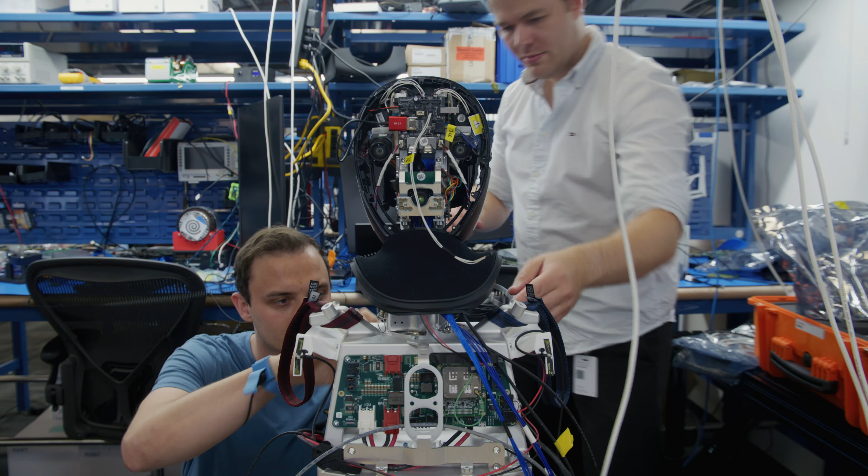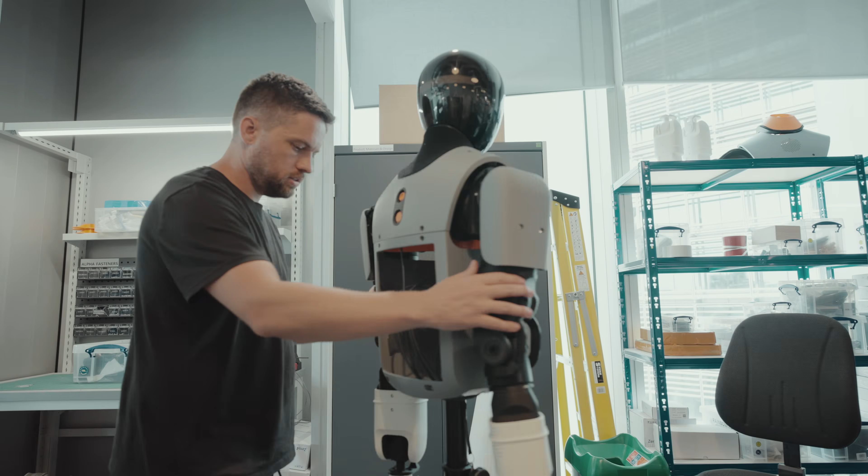We have this great vision to become the leading company in humanoid robotics all over the world. I think I've put 17 robots into the market now. I have never seen a first integration go smoothly. So yeah, realistically, something is going to go wrong. Something always goes wrong. All kinds of funny little problems are definitely going to happen.

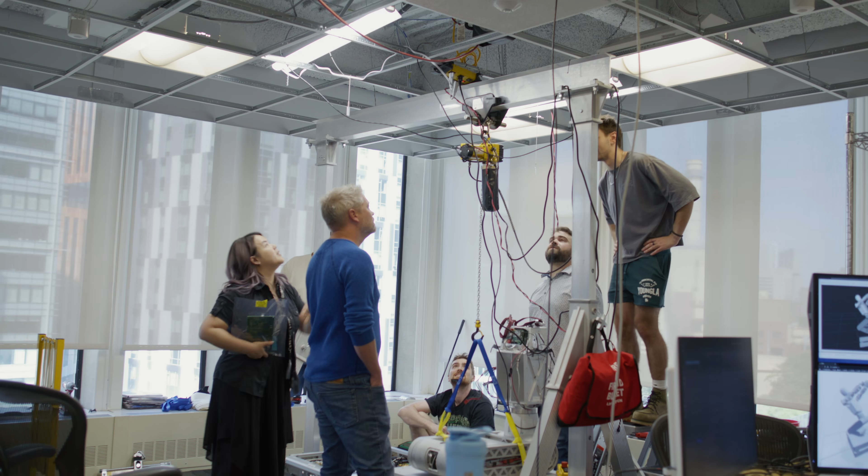Well, the arms are late again, so that's a problem. So that is making me nervous. I lost the power, the computer died. This entire thing is dead. See the number of cables hanging from this office building that we've turned into a robotics lab. We knew we were going to pop a circuit breaker.

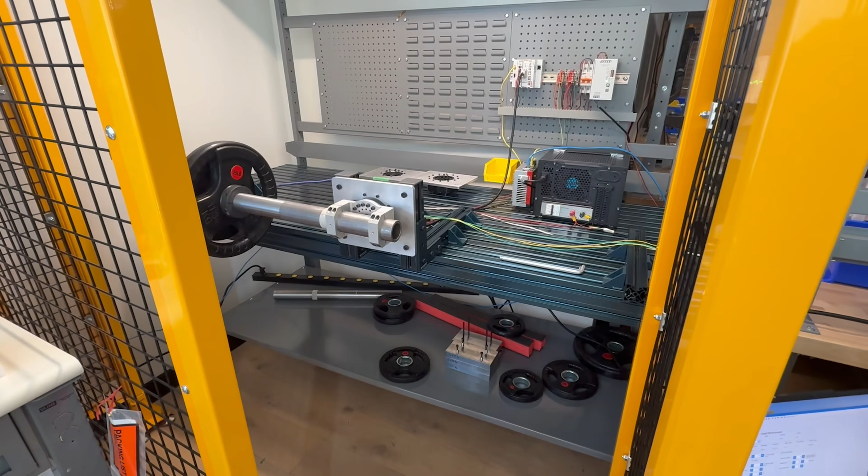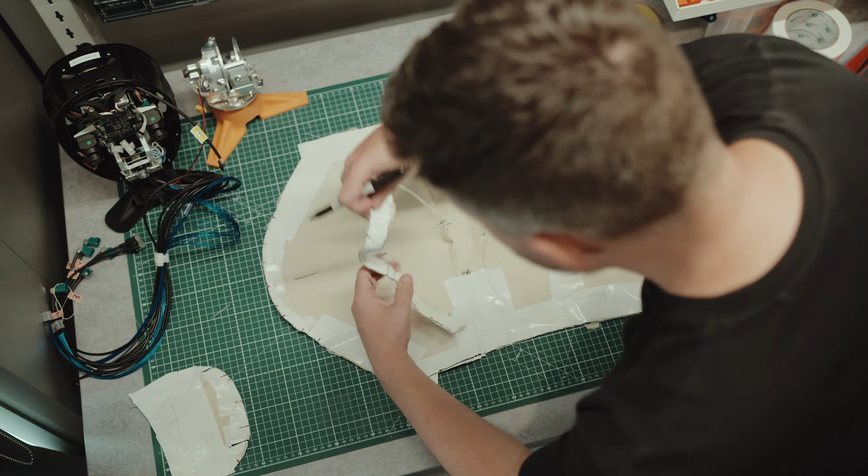At times it felt like it would be impossible to deliver on such an aggressive schedule. If we miss our mark, then immediately there are delays that cascade across the company. I feel a huge sense of responsibility. It's the hardest I've ever worked in my career. This team will not stop. They just keep going.

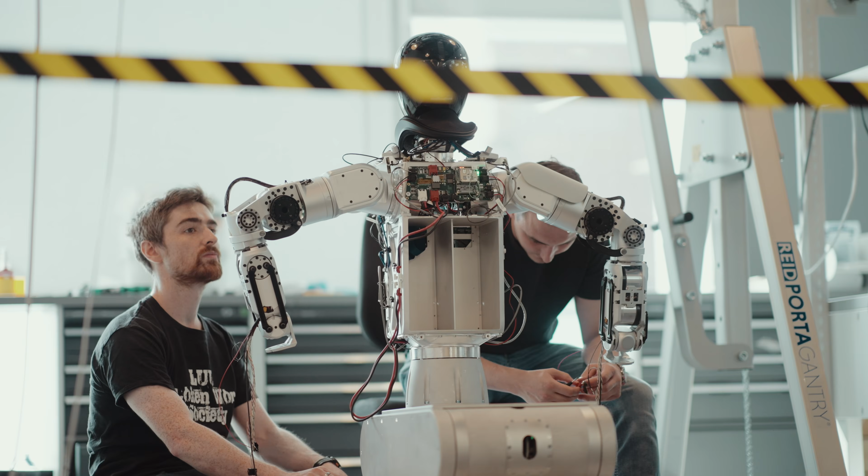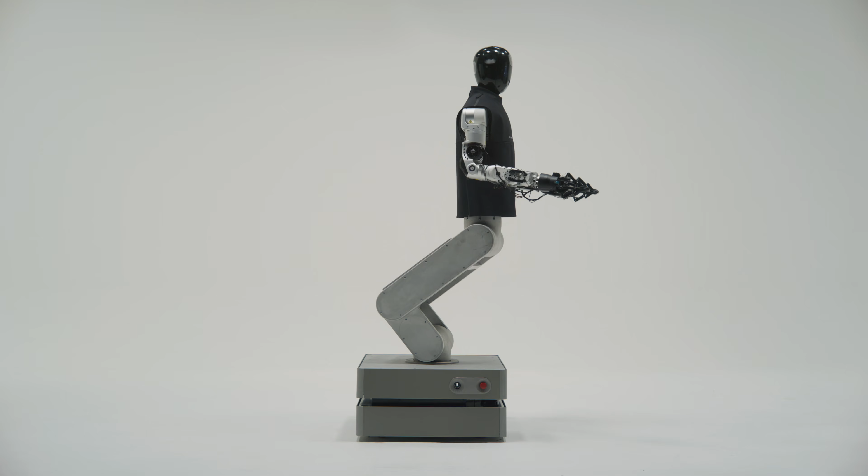There's a vision. It struck a real chord with me. Robotics can impact the world. I saw some of the names that were coming in to the project, and I thought this is an incredible opportunity. We achieved every minimum deliverable, and then we reached for the stars. The robot has turned out fantastic and is exceeding my expectations in pretty much every dimension.

Oh, you notice? Oh, you noticed. What I got for you?

Robotic prosthetic devices was my start. Snake robots, flying fish robots, fire ant swarms, drone swarms, underwater robots to hunt and capture the invasive lionfish, flapping wing ornithopter drones. I've worked on home care robots like Roomba and Braava, and some of the bomb defusal robots as well. Autonomous driving, robots that construct houses and homes. I'm missing 3 at least. Anyway, and then recently it's been very focused on humanoids.

If you had asked me a few years ago, I would have told you humanoids are an interesting research project, but they really have no path towards being able to do useful work in the real world. But over the past few years, a lot of the technology has changed to now make that possible. The AI advancements in the field of robotics controls have completely changed the landscape of robotics for everyone and made these new advanced behaviors accessible to a wide range of companies, a wide range of applications.

All of the technological advances that we've seen for mostly autonomous driving and AI, the 2 really big ones in the last 3 to 5 years, are directly applicable to humanoids. Now that they can do useful things, the supply chain will grow, the AI technology is going to continue to advance, and these robots are going to get more and more capable.

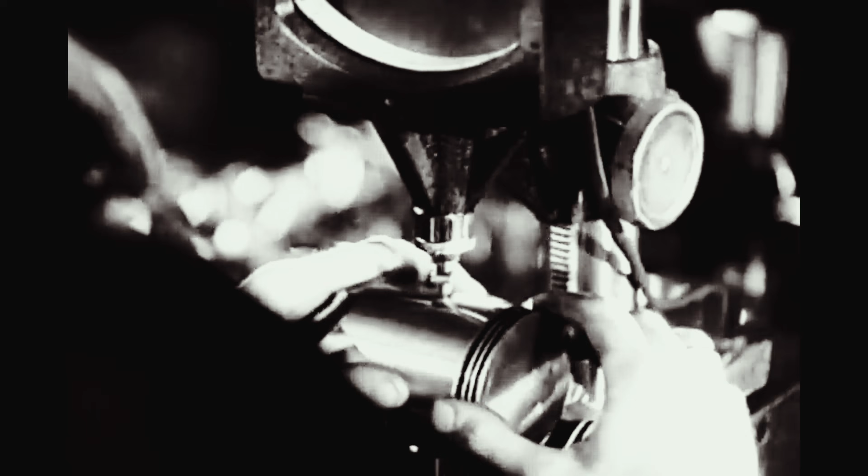A humanoid robot in general is one that is intended to solve human-shaped problems. If a person is at risk because it is a dangerous task or a dirty task or health problems, or if it's extremely dull, just something that humans shouldn't do for the mental anguish of the thing, those are prime things to throw a humanoid robot at. It's not necessarily that it needs legs, or 5-finger hands, or 2 eyes in the front of its head. But it's that the problems it's tackling are ones that are currently human-shaped.

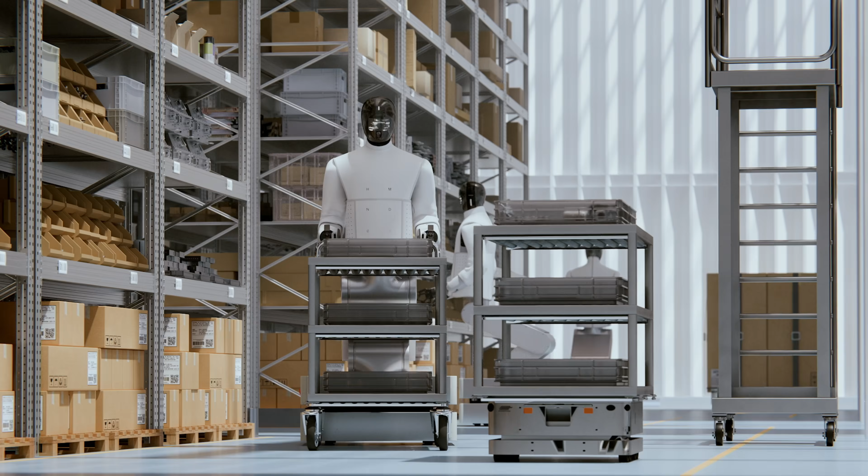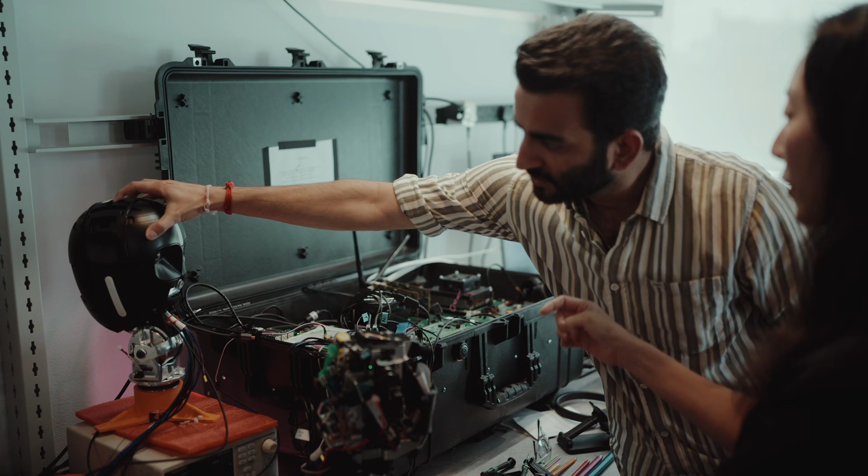What Humanoid is doing is basically a straight shot to commercialization. We're building a wheel-based humanoid system that we'll deploy in industrial and manufacturing settings because there are immense labor shortages and the technology is there today to accomplish those tasks. This is our alpha prototype, and beta is what comes next year, our production intent system. Longer term, we want to go into service and ultimately into homes to help people in their daily lives and take away all the drudgery of normal everyday life.

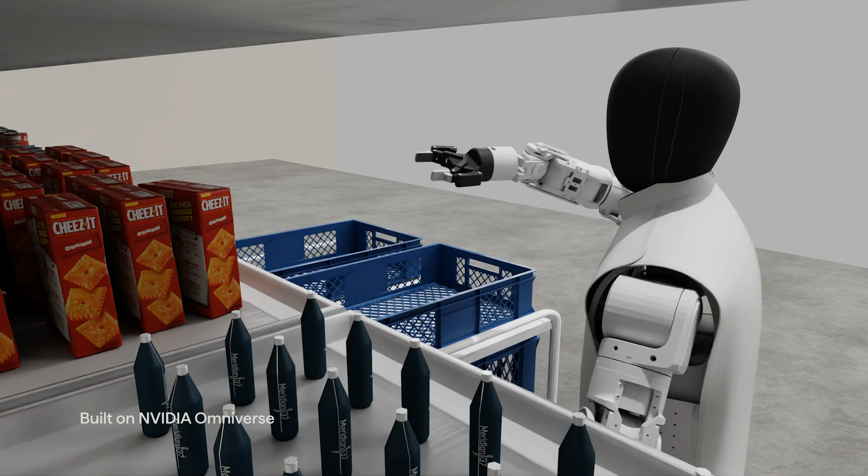The whole concept of what the product is supposed to be doing, what customers are supposed to be engaging with, or how the product even moves or manipulates, all of these concepts were very vague in the beginning. We managed to make this crystal clear in order for us to get from concept to prototype and later on to product.

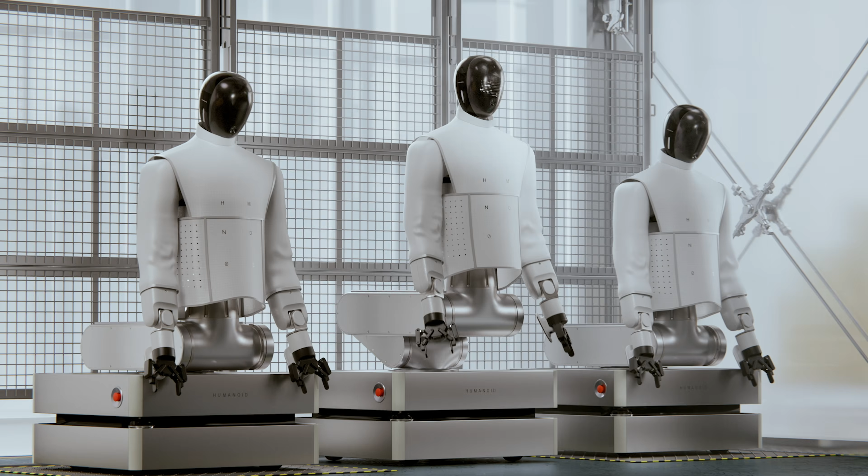It's got a humanoid form. There's a head, there's 2 arms. Instead of having hands, it has parallel jaw grippers, and it's a wheel-based system to start. Our bipedal robot with 2 legs is going to come online in October, just a few months behind the wheelbase system. So think a wheelbase with a humanoid-looking torso with arms and a head full of sensors so that it's able to sense the world around it and then perform manipulation tasks in the real world, picking things up, moving totes, sorting items, and so forth.

I'm part of the HEAD subsystem team, a relatively small team, about 4 of us here in London. For me, Humanoid and coming here was a lot about the people and the team that Humanoid was putting together. I saw some of the names that were coming in to the project, and I thought this is an incredible opportunity. So it was a combination of incredible people, a clearly passionate founder and backer in Artem, and the technology being right, and the people who are there, the technical leadership to bring it to bear.

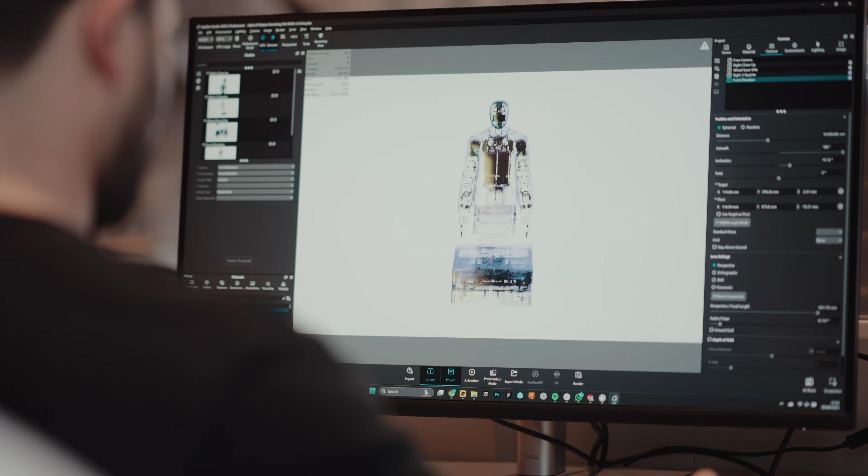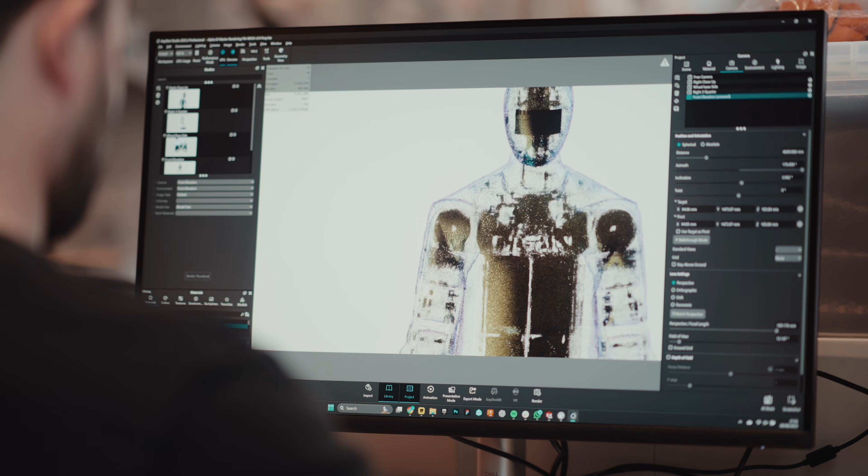I've got to be careful not to get too emotional, but when my mum was quite sick about 2-3 years ago, and round about the time I was just getting over her passing, I got a call from the guys here. And the way they sold the company to me was like, look, there's a vision and robotics can impact the world. And it struck a chord in me that, it might not be 2 years away, 3 years away, but if robotics could have helped my mum in hospital, then I think that's me contributing back to the world. It struck a real chord with me.

The design team was here before the engineers were fully formed. It was a good time to create the concept work so that when the engineers did arrive, we had a fully formed picture. One of the very first things we discovered was, okay, we want to be comfortable around robots, right? Everyone looks at sci-fi films, Terminator, whatever. There's so much anxiety, but we knew first things first, if you have proportions of a human and it's not this hulking beast, then that's a good foundation.

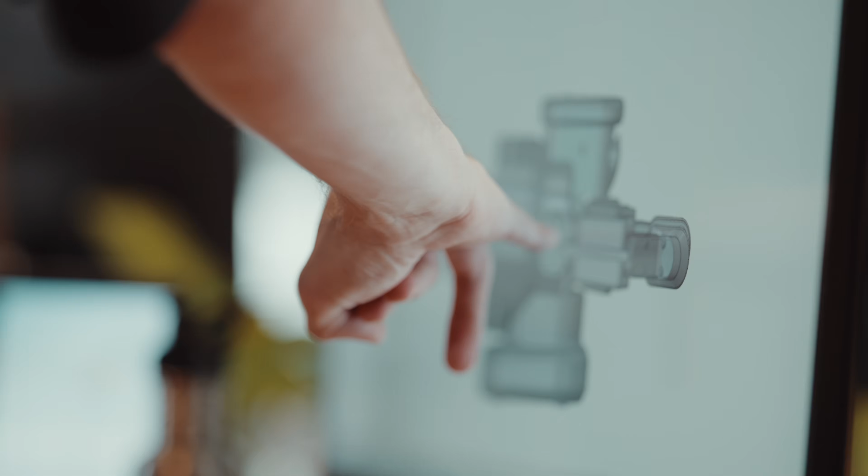When you interact with a humanoid robot, the head is a natural place that you want to do that. At the same time, you want to avoid that uncanny valley, to avoid trying to exactly replicate a human face on it. So we've aimed for this simplified head where it's still very much head shape and proportion, but we've not got eyes that are going to be slightly disconcerting for anyone interacting. It still feels like a robot, but it's got a sense of familiarity to a human.

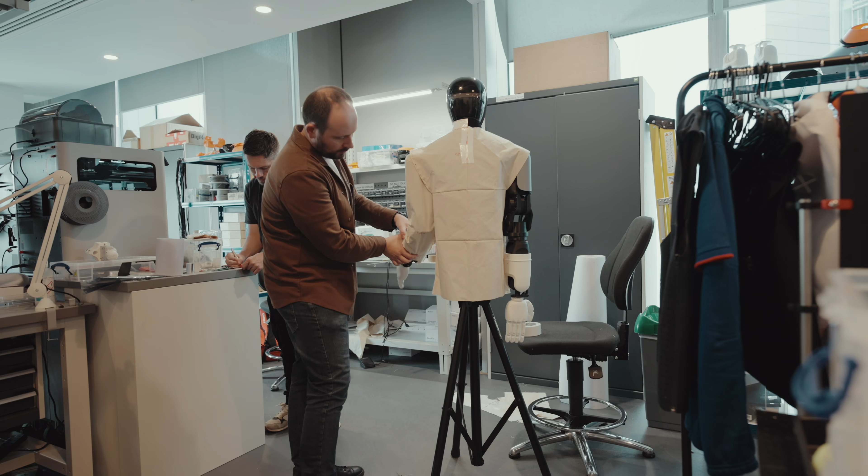And that's what led on to the clothing. It's not lying to anyone, it's not trying to look like a human, but the fact it can wear a uniform means if it goes into a factory, the person who's been working in a factory for 20 years isn't suddenly appalled by this monster. They look at it and go, oh wow, it's a colleague.

Compared to plastic and metal, it's way lighter. It's really complicated to send parts around the world. But with clothing and fabric, you can flat pack it. We can completely match our robot to the customer's identity. We've done quite a few where we've looked at a typical worker who's working on the assembly line, and we've copy-pasted that onto the robot.

You guys know the head somewhere?

Welcome everybody to the first core platform team meeting ahead of our big push in Boston to build all our robots. Most of the electronic architecture of the robot has been designed in Boston. So they're doing the initial plumbing together of the very basic computer, the brains of the robot, and then they need the rest of the engineers to fly over and build stuff around the brain.

We're going to be traveling out to Boston very soon to integrate our head into the rest of the core platform. Some great just-in-time manufacturing where everything's going to come together. It's going to be great. Let's set our expectations together now. This next couple of weeks is not going to go smooth. Every time we do a new technical integration, we're going to find a new problem. So we'll go through those challenges.

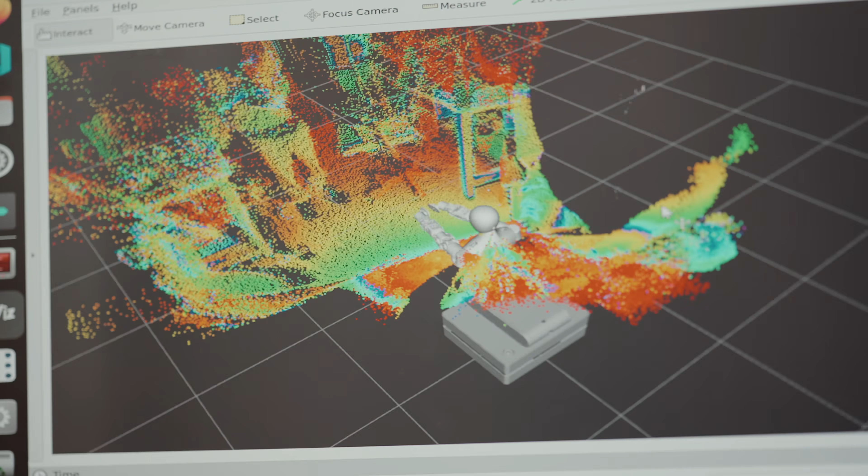We'll set a work plan for the day where everybody in the room has a clear goal for what they want to accomplish that day. My job will be to make things talk to each other, make sensors work with the brains, and get it all to start moving. And then we'll ship it back over here. And I'm excited. I've never traveled with work before.

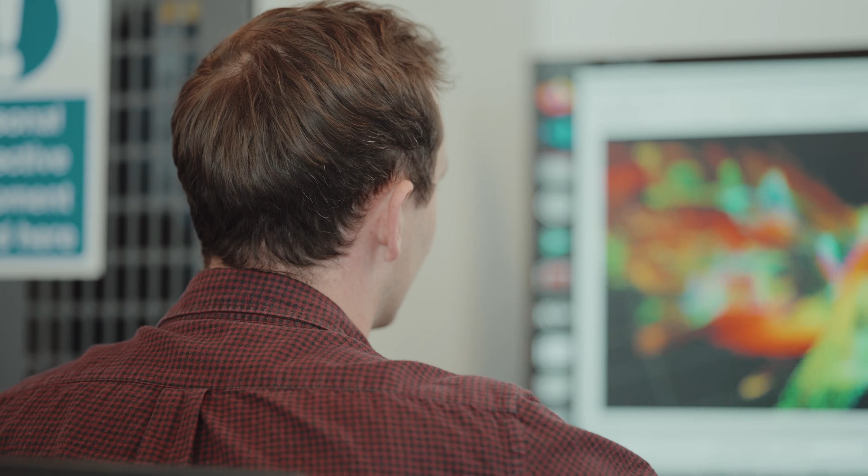The teams have been going all out, faster than any team I've ever been a part of to design this, and honestly, it looks awesome. The nerd inside me is very excited to go and work alongside some of the best people in the world. Literally this morning, a bright orange Pelican case with a head has arrived in Boston ahead of us. So they've got the fully complete head with the neck. It's going to be really exciting the moment we get to attach it to the torso, again with the teams we've worked so hard with.

My suitcase is literally right by my desk. I will be heading out there this afternoon. I think I've put 17 robots into the market now. I have never seen a first integration go smoothly. So yeah, realistically, something is going to go wrong. Something always goes wrong.

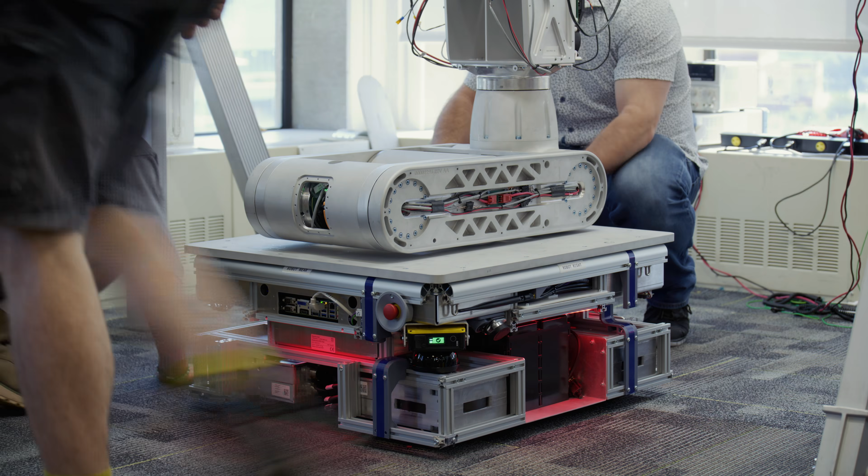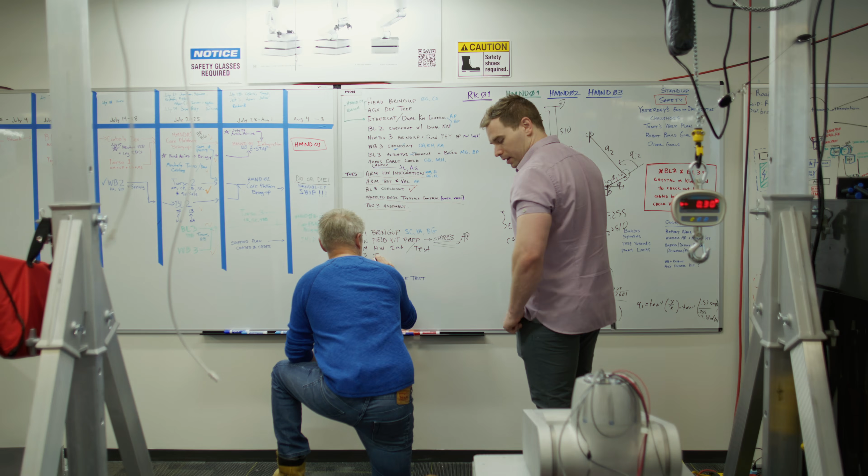The team has now come together in Boston to execute the build of our very first prototype. So we finished the designs in London, Vancouver, and Boston roughly the same time. We order all of our fabricated components, and this effort now is about finally putting it all together for the first time. And we're gonna get the scales here, so we'll weigh the linkage as well. Then we can update the URDFs. Yeah, Randall's on that. If we get this done, we're in such a good spot today. That's a really important one, yeah.

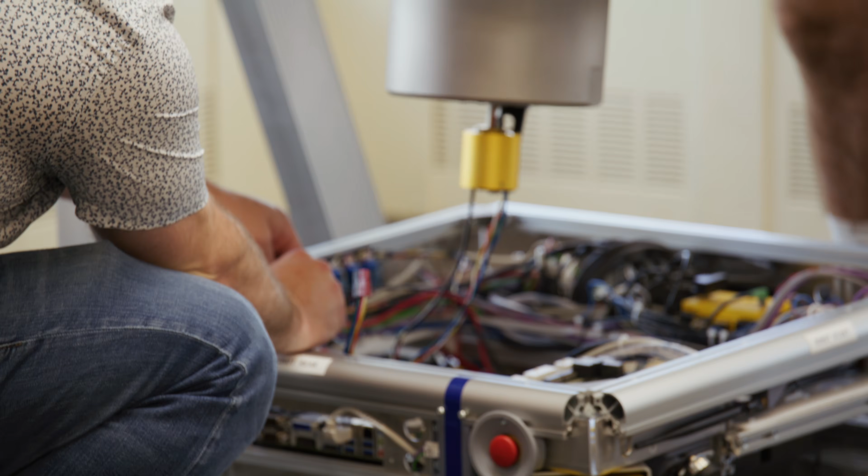We're building 3 robots here in Boston. Robot 1 will stay here forever and become a development robot for our controls team here. The other 2 robots, though, are our main robots to ship to London. So those are actually our priority.

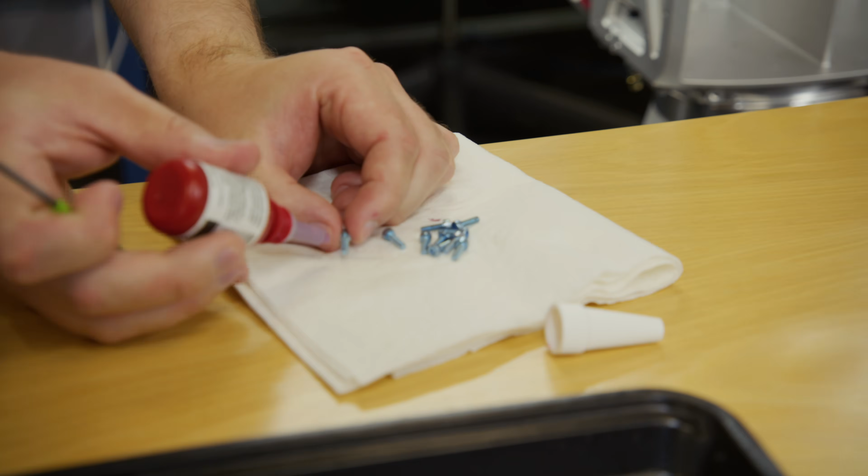We're putting together the Humanoid E01. So this is our wheeled base robot, and this is after less than 6 months of design by probably the world's most impressive robotics team that I've ever seen, certainly I've ever been a part of, and I've been a part of quite a few.

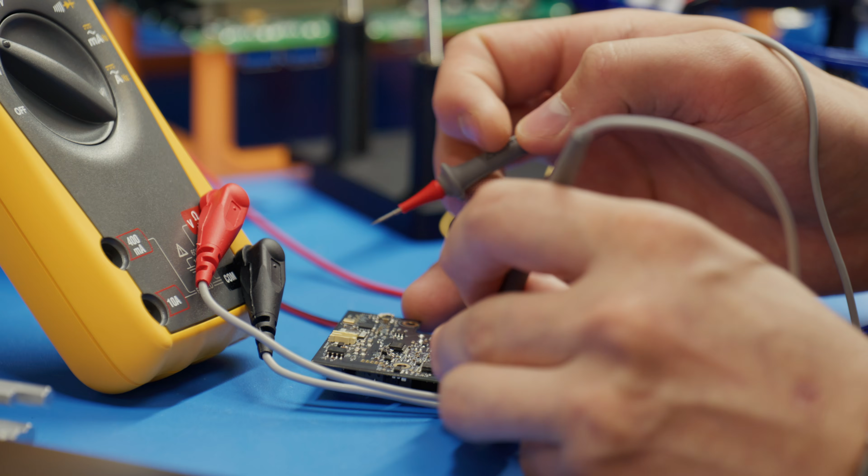What's in the office now is a mishmash of people from all the locations with different disciplines in mind and different goals. The mechanical team that designed all the mechanical systems within the robot, the electrical team designed all of the printed circuit boards, custom electronics, all of the data networks and compute systems, the software team who's working really hard to pull that all together into an actual functioning system.

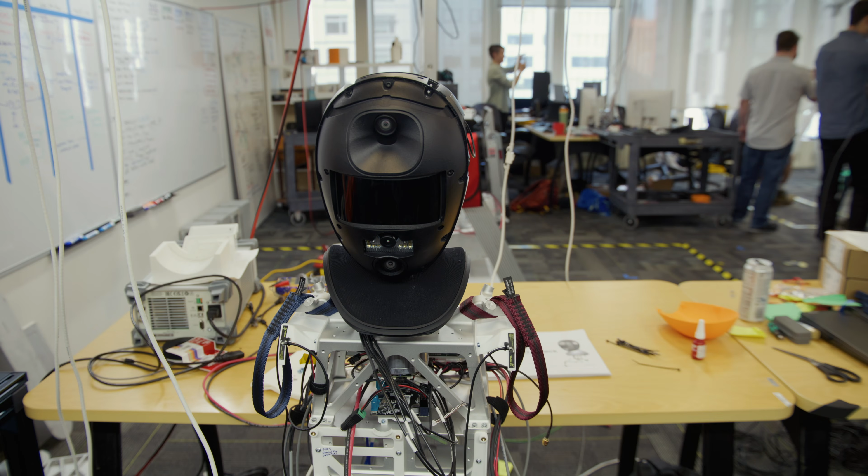There's a behavior development controls group which is trying to make the robot actually act out meaningful behaviors in the world. And then there's an integration and test team which is based in London. We knew people from London and Vancouver were going to be coming here last week and this week, and we knew that it was going to be chaos, but it's fun chaos.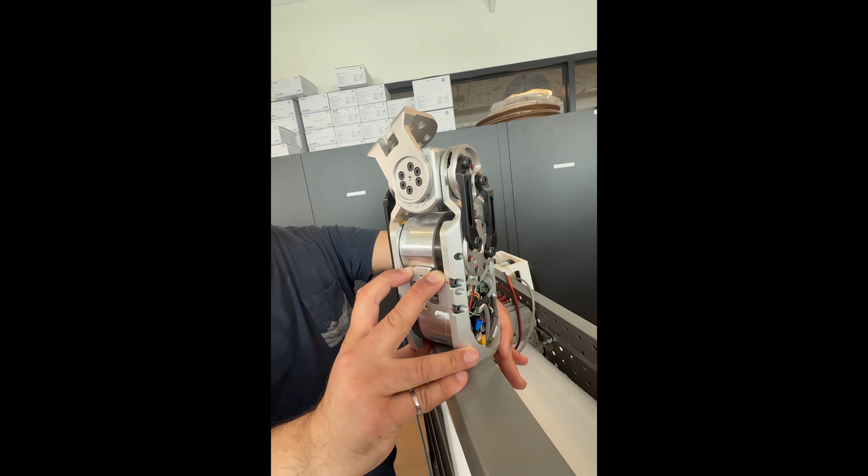In Vancouver, we develop actuators, and also we design the arms and legs, because arms and legs are parts around the actuators. If you look at the humanoid as one system, torso, arms, legs, everything works together to move the hand somewhere to do something. The 2 arms will sit here. Okay. That is very great. And the crew is enjoying the dinner.

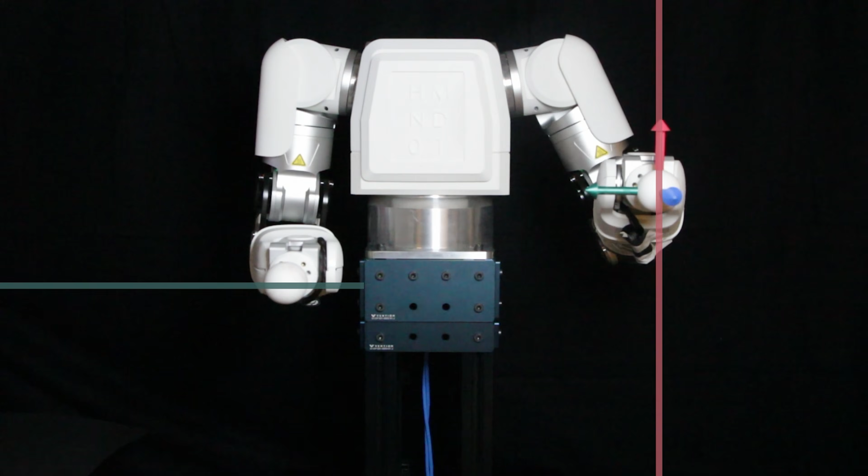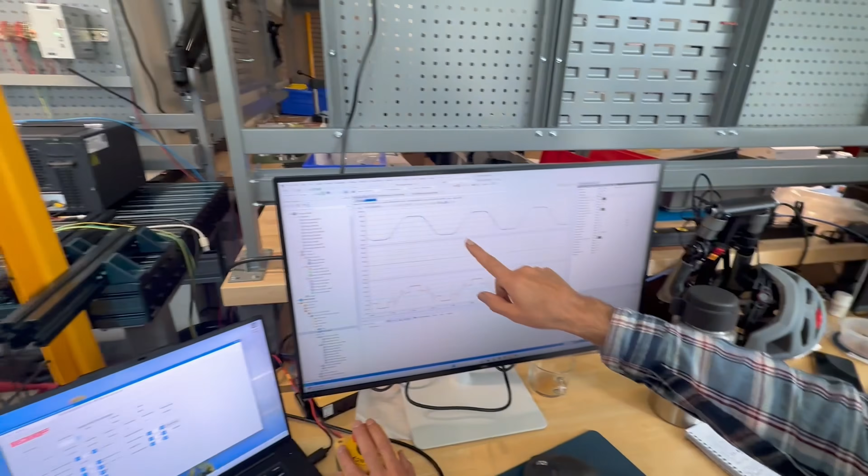I'm pretty happy and also confident about the arms that we developed here. We did a lot of stress tests, load tests on each part, each cable, each actuator. We are pretty confident that we can get a good result. So the team is very busy assembling and finishing and packaging the arm. Hey Boston, we're gonna unpack this, go through the process.

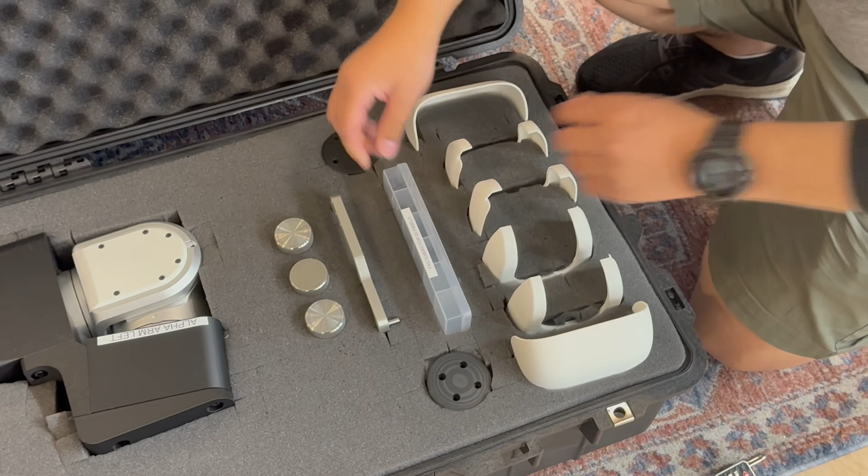For the first arm that we shipped to Boston, we couldn't expect that it would get stuck in customs. We didn't know that it would not meet the deadline and also the timeline. And we didn't know where it was. We didn't know if it was in a customs process or even in another city.

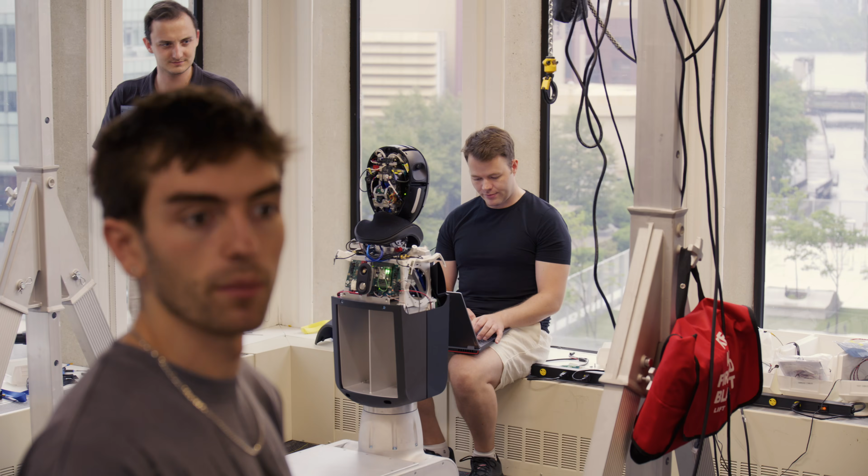Well, the arms are late again, so that's a problem. So that is making me nervous. The delay in the arms is a huge deal. We've got to try to push them through customs. Or we could decouple that by keeping one of the 3 robots here, which is the plan anyway, and shipping the robots, running the risk of finding some problem. And maybe we'll solve that problem, but they would have to duplicate the solution on their own in London, which might not be that big a deal because we'll just fly to London and help, but we'll have to figure it all out. All right, everybody, time for stand up.

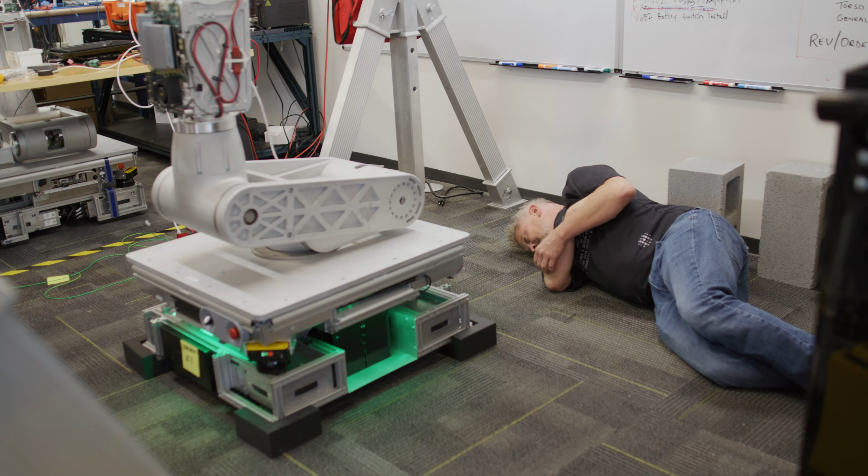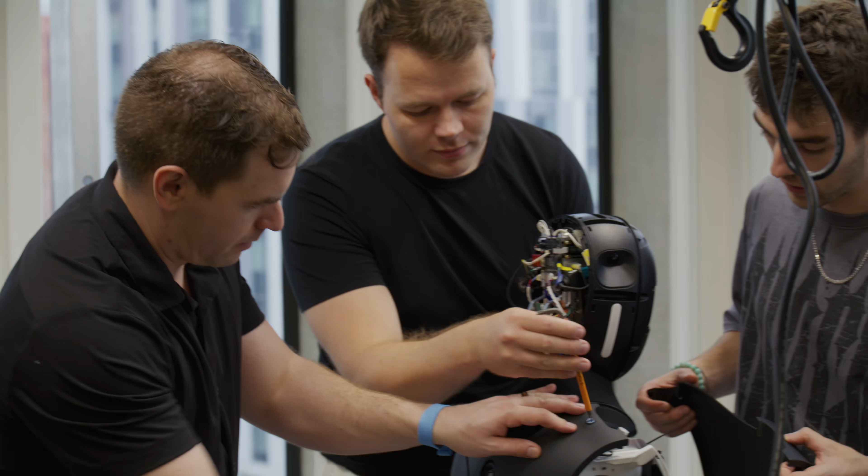A lot to do today, very exciting stuff. So if we miss our mark and we don't get our MVP, shipping at least one robot by Friday, then immediately there are delays that cascade across the company. And these are delays for our product team who are actually trying to get our robots into the real world. These are delays for our software team who are trying to develop those skills for the real world. These are delays even for our manufacturing of more of these robots. Like, it is all lined up. And the window of opportunity, of flexibility, is very small.

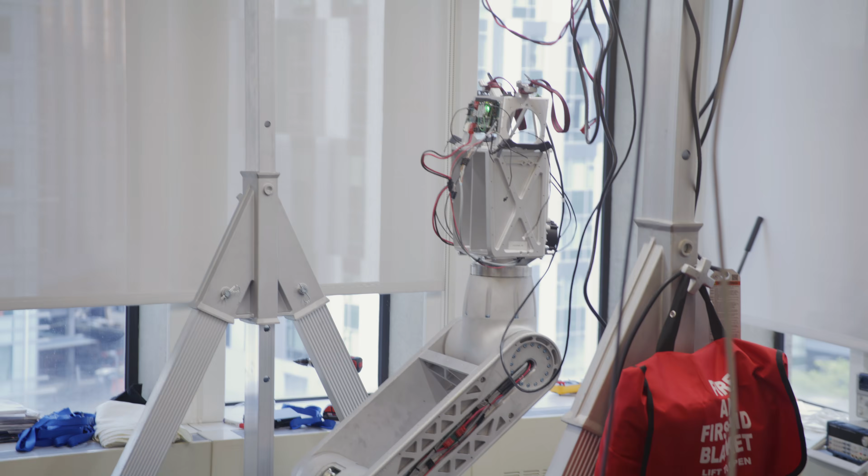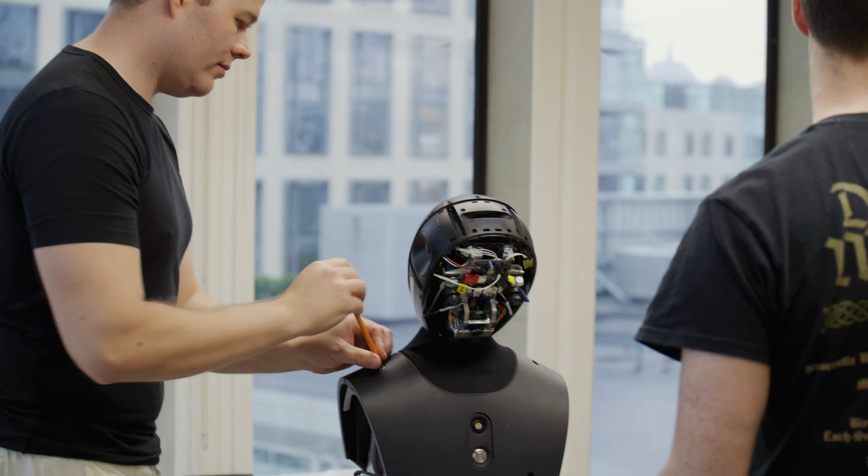I lost the power to everything. Your computer died. Oh my god! Also, this entire thing is dead. And the one over there is also dead. So we need to call facilities and try to flip the breaker back. See the number of cables hanging from this office building that we've turned into a robotics lab. We knew we were going to eventually pop a circuit breaker. So the bet was whoever pops a breaker first has to take a shot of this really disgusting smelling alcohol we have. And so I've just popped 2 breakers and now I'm up for 2 shots.

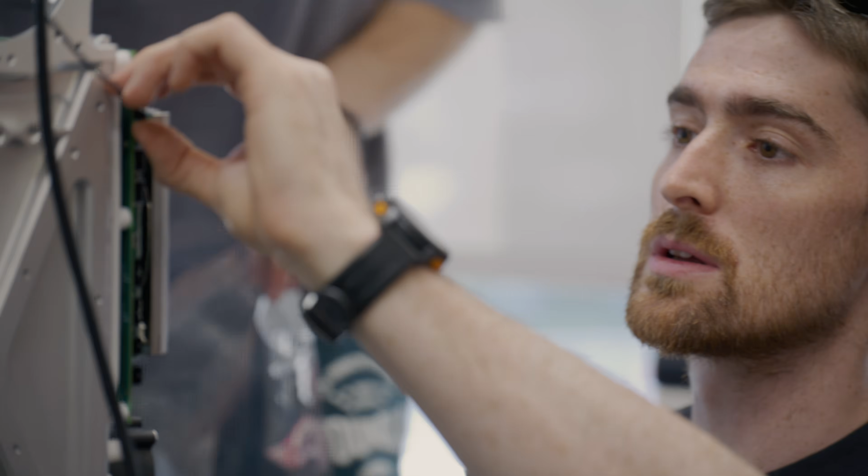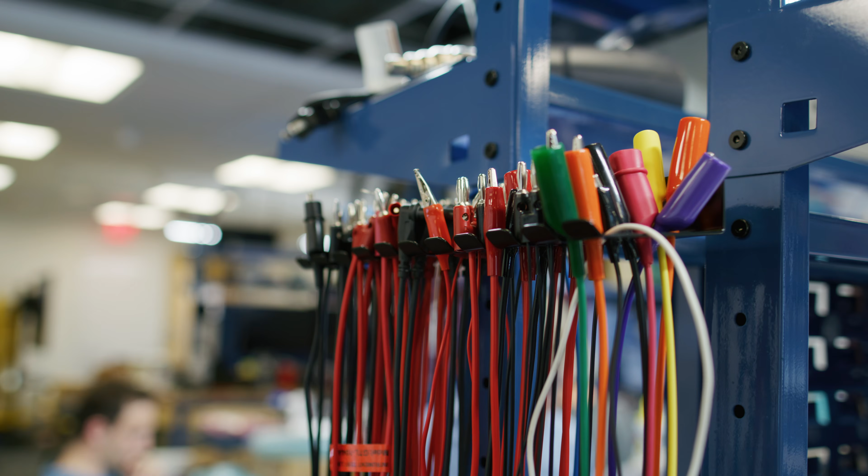We now have like the best people from basically every company. We've got Tesla folks, tons of BD folks. It's crazy. This team will not stop. Like, they just keep going, and oftentimes I will be at 6 o'clock, 7 o'clock, and I'll know from looking around and feeling the energy, and I'll just start buying dinner. I feel a huge sense of responsibility to the other locations to sort of hold up our end in Boston. All kinds of funny little problems are definitely going to happen. It's a lot of pressure.

Today is a huge day. I mean, last night people were here past 9, the night before people were here past 9, but the robot is now exhibiting more behaviors than we ever expected. It is easier to use, it is moving very cleanly and smoothly. It's a huge win, which kind of means today we get to sort of push it.

All right, so on the left is where all of our cables and PCBA work is going on actively as well. On the right is much of our software development. And then over here, right in front of me, that is torso number 3, getting assembled right there. And that's linkage, base linkage, and wheeled base 3. You know many of these faces. Every day, the London team's been working, so we've got these really long work days when you start to incorporate the fact that all these offices are in different time zones, and it's really working for us.

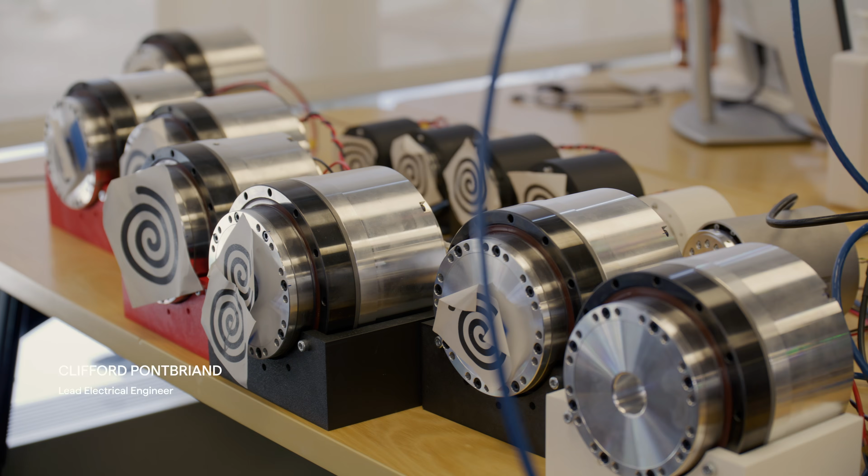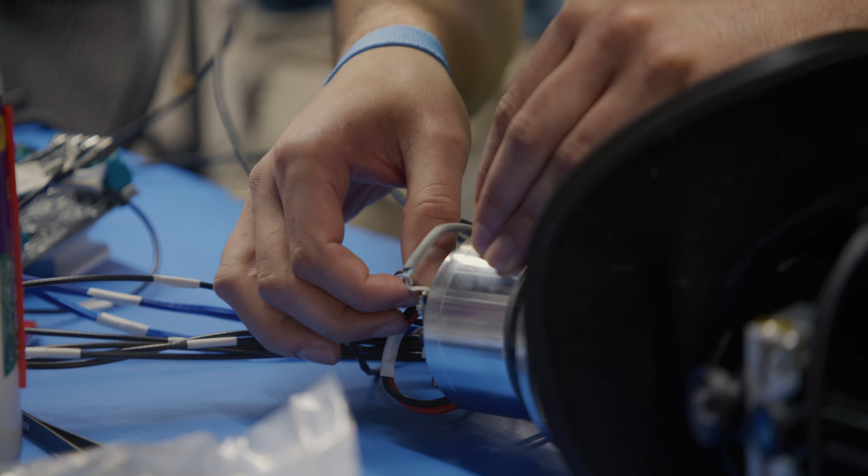The core platform is where we pull things together, so this last 2 weeks has been an integration effort, and that's where the challenge is. When you take these disparate parts, we designed components of the system here in Boston, in London, and also in Vancouver, and then when it all comes together, we try to define the interfaces early and design around them, and we've had teammates from across the 3 locations working together. It's gone really, actually, better than I expected. It's gone really well. Good job, team. Much to do, but we're so close.

See y'all soon, and we'll send tons more videos today, and we'll definitely put a huge message out when the arms arrive and a huge message out when we crate. Yeah. So. Thanks, guys. See you in a couple weeks.

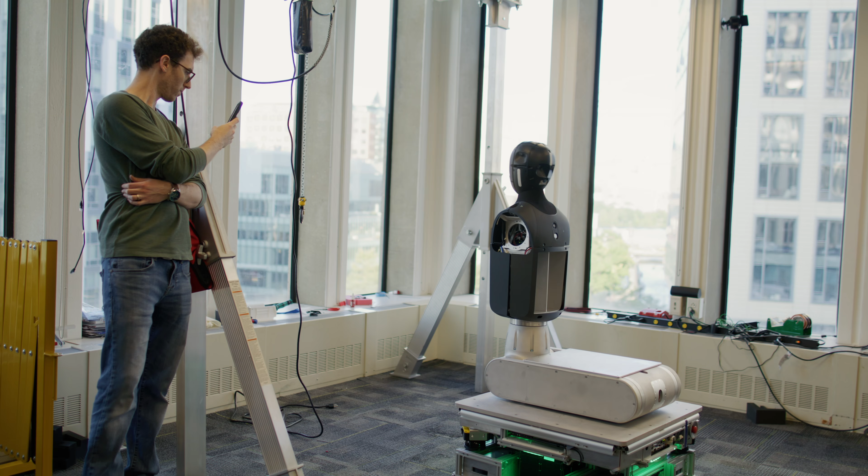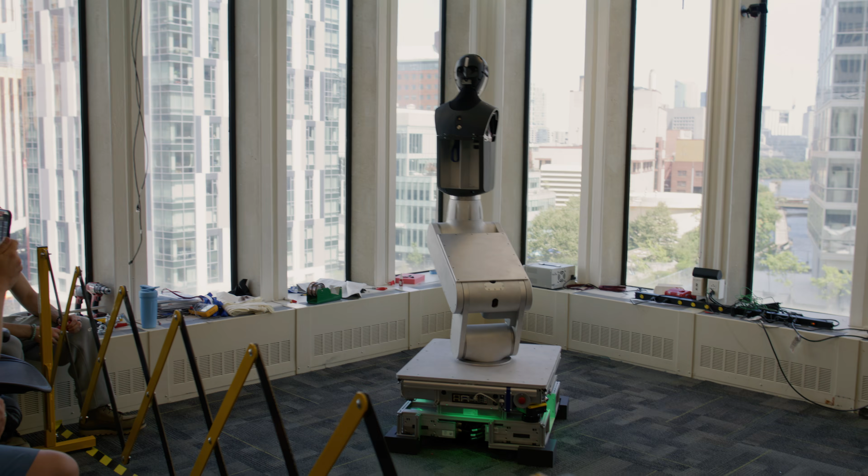So what you guys saw today was the fully assembled robot actually standing with the dual linkage, everything going. And that was like, okay, it moves, we can control it, nothing blew up, no red lights, no horrible sounds. This will work. Holy crap. And remember, plus arms.

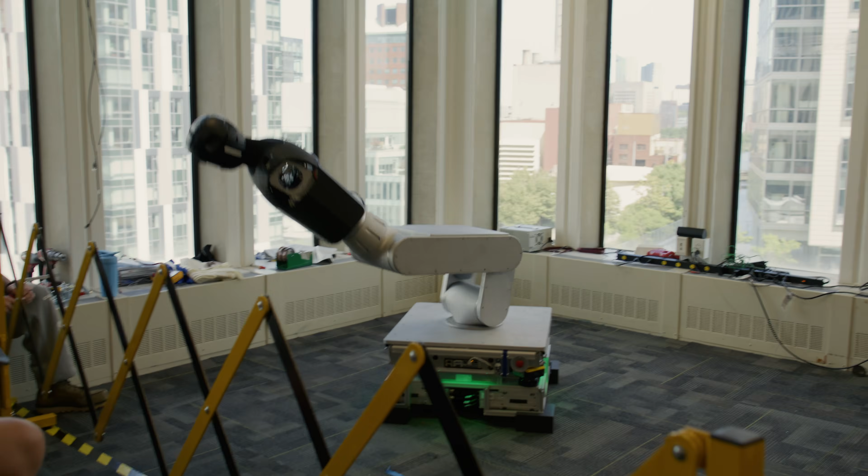We have done a full checkout now. We did a sequence of poses. We've done head integration. We've streamed video from all the cameras. Right now we're chasing down one last bug for wheel-based control so we can roll it onto the crate and start packing it up. And other than that, we're basically ready to pack. Wow!

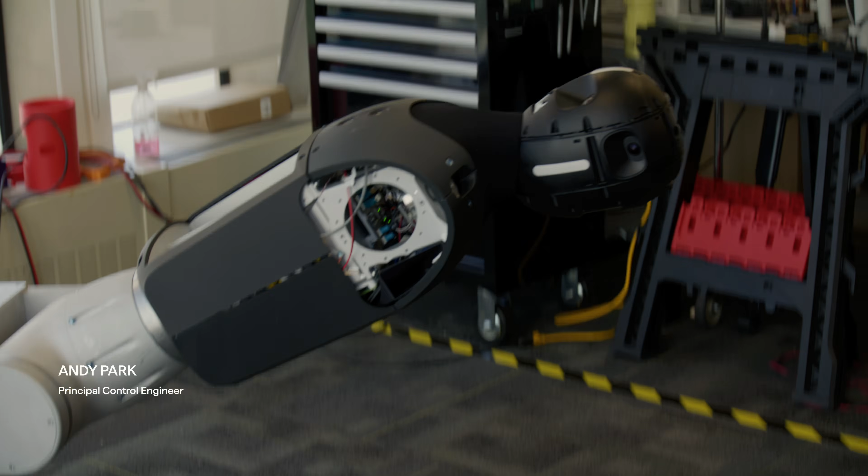I wanted to go through those poses because the base is supporting all the weight. So when it's fully stretched, I want to make sure that the base is stable. And I wanted to show everyone that these are possible range of motion. This is really going to be the closest this thing looks to real until London.

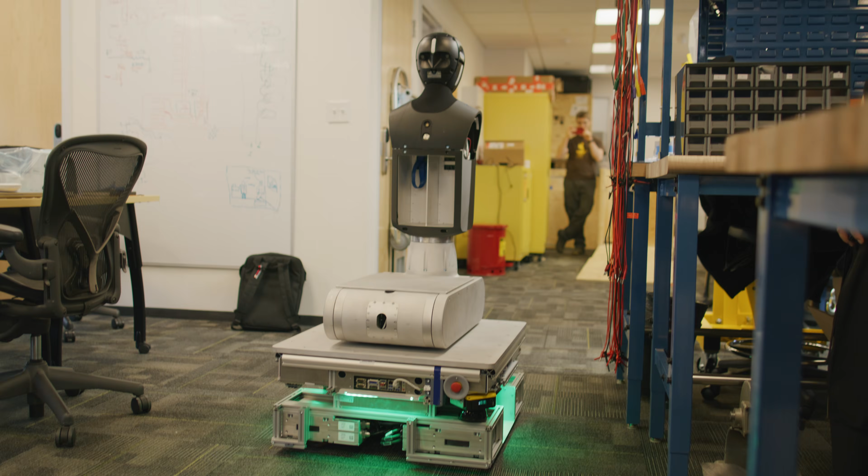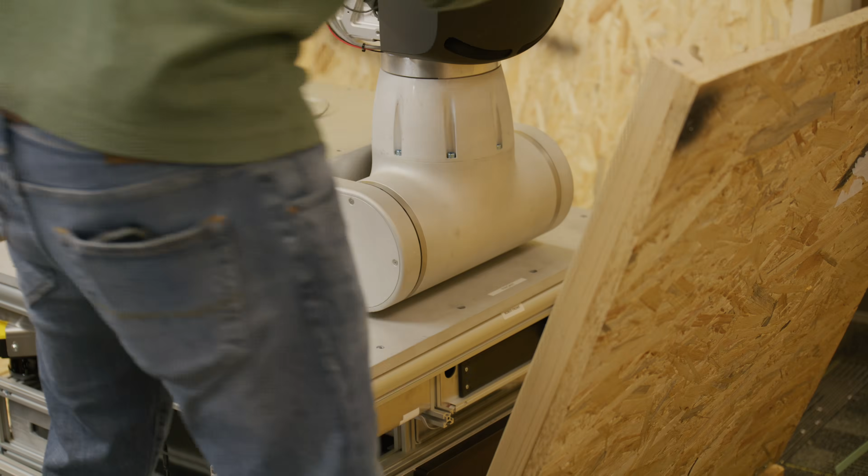When the robot ships to London, that will be an amazing accomplishment for everybody in all 3 locations. Personally, it will be a conclusion to, I think, the hardest I've ever worked in my career. This robot is being packed today, but actually leaving the States on Monday. It should be with us in the UK, all customs go well, on Thursday.

Boston was an absolute blast. We achieved every minimum deliverable in the first week, and then we reached for the stars. The team from London has been a huge influence in the team, a huge amount of just engineering horsepower that have attacked the problems, really dug in. When the Boston team delivers these robots to London, I have confidence now that team is equipped to handle whatever problems that they find.

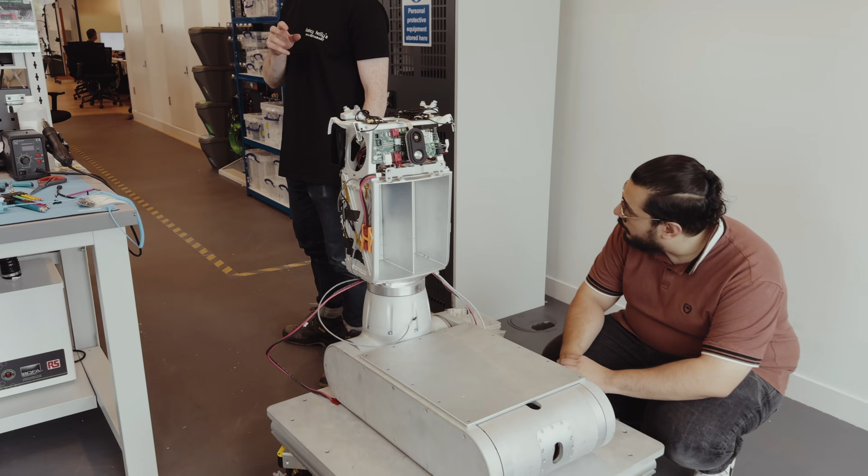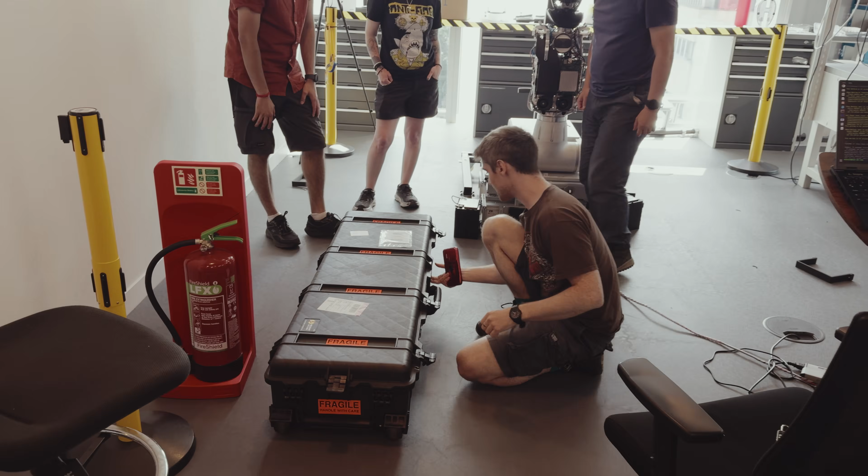When the robot came out of the box, bring up and reassembly after shipping was an hour, maybe 2 hours. And it was back to doing those same full set of capabilities, every single thing going at the same time, full success in the same day, showing how mature the thing that came out of Boston really was. And that is just incredible. If the arms had shown up, that's the only thing I could have been happier.

Finally, we got arms in London, safe and fully functional. And also, Boston team sent a technician here. We integrated the arms to the torso. Right now, it's working properly, very nicely with the rest of the system.

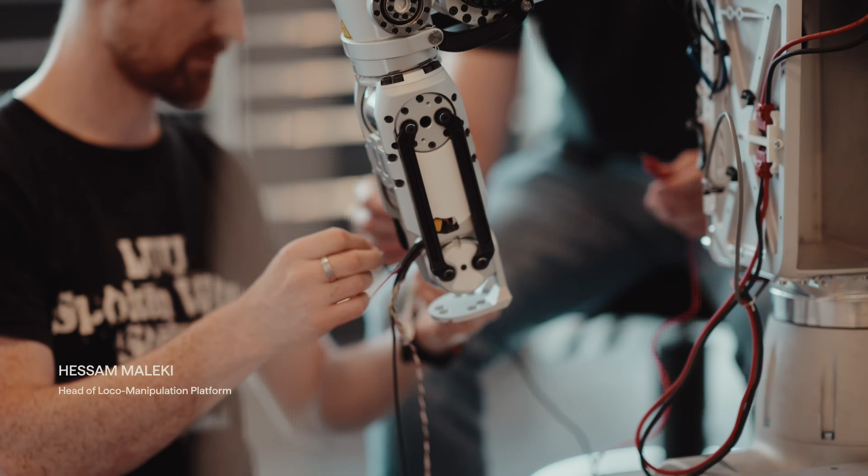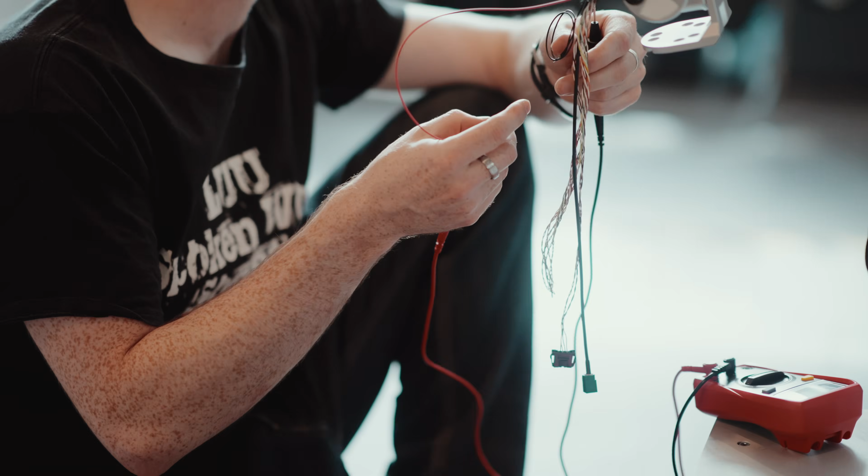And now that the London team has this robot, it is really up to them to take us from everything is feature complete, functionally capable, to we are now actually doing something with it. So that's training, creating policies, testing, and actually having the robot do real work. It's a massive amount of work, and it's on London now.

I'm extremely excited to share this prototype. This is probably the most beautiful prototype I've ever seen, and significantly more capable than I had expected at the outset. Typically, you've got robots that are very kind of just mishmashed together, but this is not only a very capable prototype, but it's also a very aesthetic prototype as well.

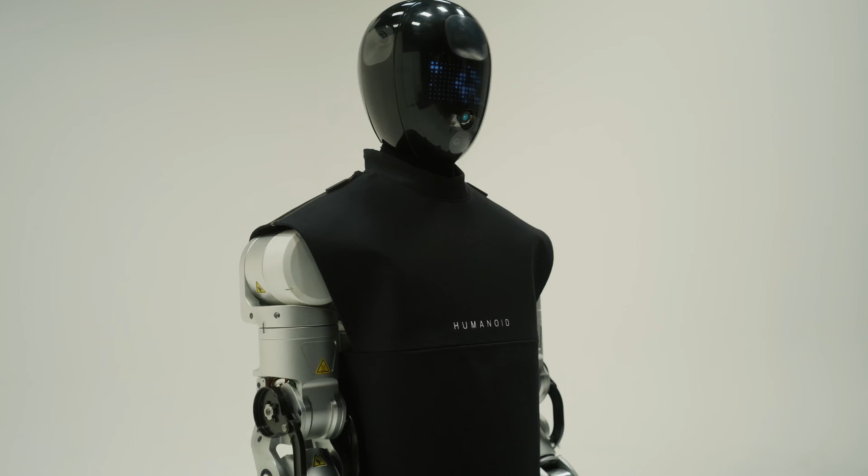This is just the beginning for us, but we already have done a lot of market validation. We already have done a lot of proof of concept projects for a company at our stage. Next month, we're starting to use our alpha prototypes in proof of concept projects with real customers, and we're gonna get the market validation and the experience that we need to iterate.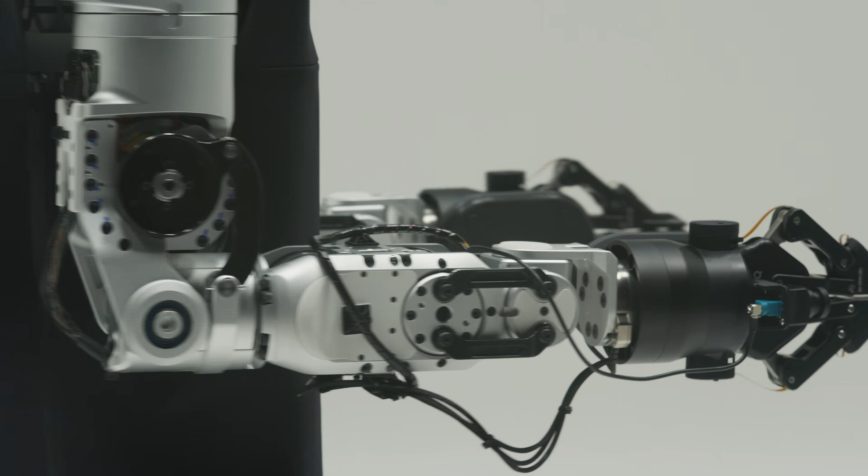It will have to do real work in front of external parties who are not roboticists, who have not seen what we've been doing, who might not understand the speed or the challenge that we've taken on. And they need to look at it and say, I represent some massive company who has a need, and I need you to do this task for me. Does it work? Yes, no. I mean, it just ramps everything up to 11.

I personally feel incredibly proud. We managed to pull all our resources together, to pull all the expertise that we've had and make this dream happen. So definitely very proud.

The shift is now moving from hardware to software and AI teams. So there's a new sprint over the next 6 weeks to be able to develop the AI capabilities using this fantastic hardware to be able to perform tote handling and machine feeding use cases. So this is an extremely aggressive timeline, a new challenge for the team to meet to show that our hardware and our software and AI can work in the real world.